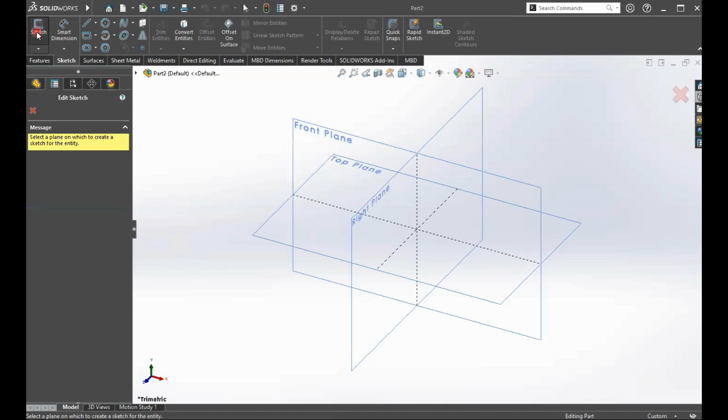All right, so we're going to start by using the section views to create our part. We're going to begin with the solid part, then add the ribs, and finally the holes of the part. So we're going to start by going into SolidWorks and creating a new part. Just give me a second here. Okay, so we're going to create a new part. Click OK. And finally, we're going to go to Sketch and create a sketch on the right plane.

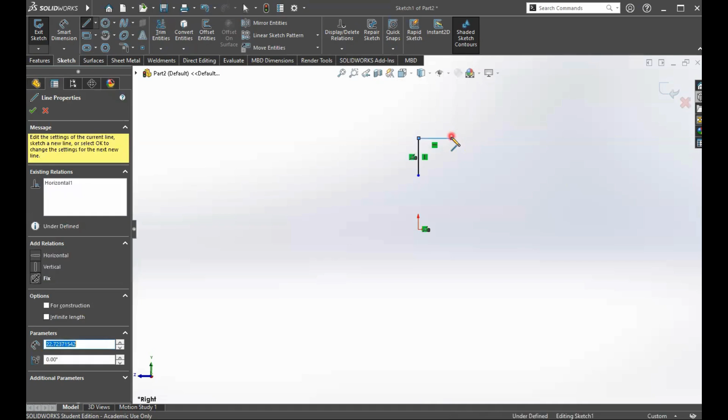So let's go to SolidWorks again. We're going to create a line. Here, this part, we're going to start sketching like this and like this. Okay, so what I want you to have is this random form over here that is going to make sense later. So just trust the process.

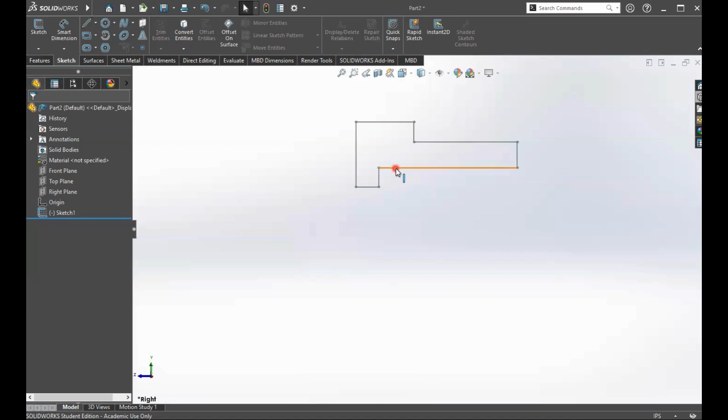And be aware that here at the bottom right of the screen, where it says custom, we have selected inch, pound, and second, because our dimensions are in inches. Once we do that, you can see it turns gray. Don't worry, just right-click on it and click on Edit Sketch. So you can edit the sketch, and now our dimensions are in inches. So we're going to start adding our dimensions to this part, starting with these 3 inches.

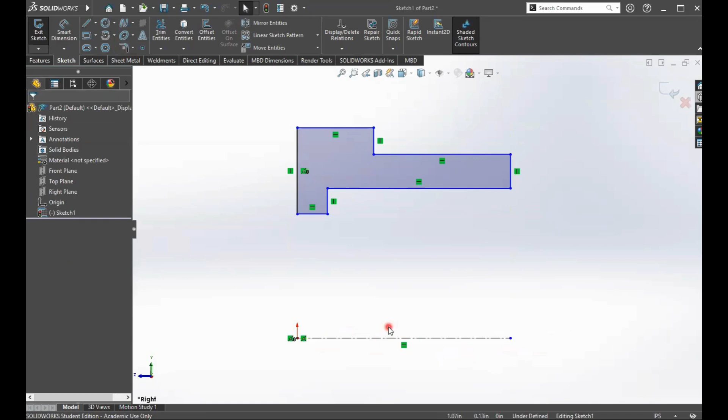So when we go back here, we're going to create that axis by selecting, in this line menu, a center line, then clicking here just in the middle, creating a line over here, then pressing Esc. You have created your axis. Now we can use this axis to create our dimensions. We click on Smart Dimension, click on the axis, and then on this line. And as you can see, if I pass my mouse through the line, I can actually write the diameter, not just the radius, so I don't have to make any calculations. So I'm going to click here and type 3. Now we have our first 3-inch diameter from the drawing.

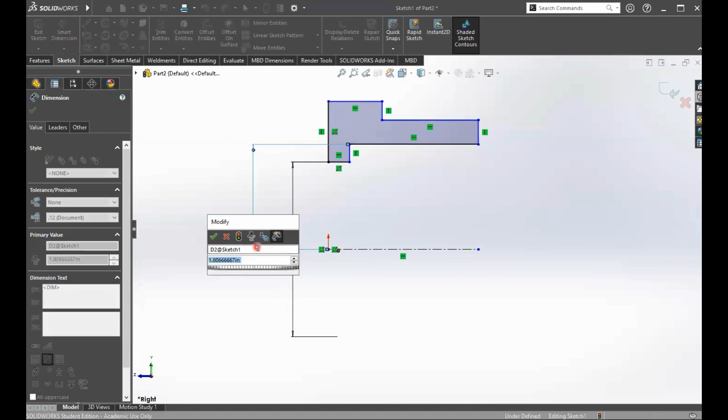Then we're going to write our second dimension, which is 3.5. Let's go back to SolidWorks and create another dimension of 3.5. Oh, sorry. As you can see, I did it without taking the diameter into account. So let's go back a little. I'm going to delete this, and create the smart dimension from here to here. Then if I pass my mouse through the line, I finally have the diameter, and I can write 3.5. And then I have my first 2 dimensions.

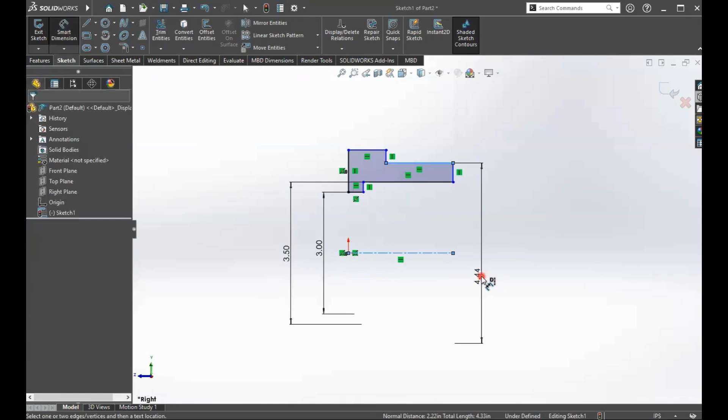Now what I'm left with is these 2, which in our drawing are 4.0 and 7.5. So let's do that. Here to here, it's 4.0. And here to here, it's 7.5.

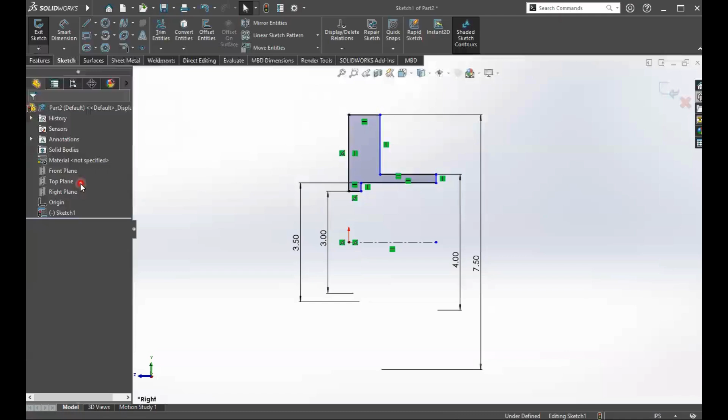All right, now what we're missing is just the depth of this hole, the depth of the part, and the final depth of all the extruded part, which we can find here in these ordinate dimensions, okay? So here, the depth of the hole is 0.5. So we're gonna go back and click from this center to this point. It's going to be 0.5.

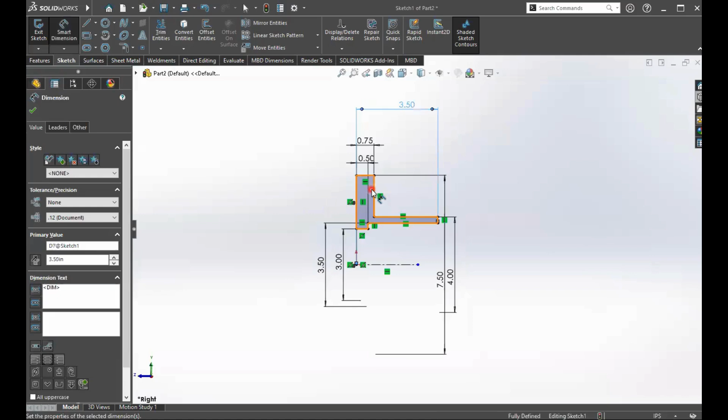Now again from the center to this point, it's going to be, let's see, 0.75, and the final length is 3.5. So we're gonna make from this point to this point 3.5. And here we have our final part that we're gonna revolve and finally create our part.

Okay, so here we're gonna go to features, then to revolved boss/base, and our part will select automatically the axis of revolution, which should be this one. And then in direction, we're gonna click blind and 360 degrees and click OK. And ta-da, we have our flange.

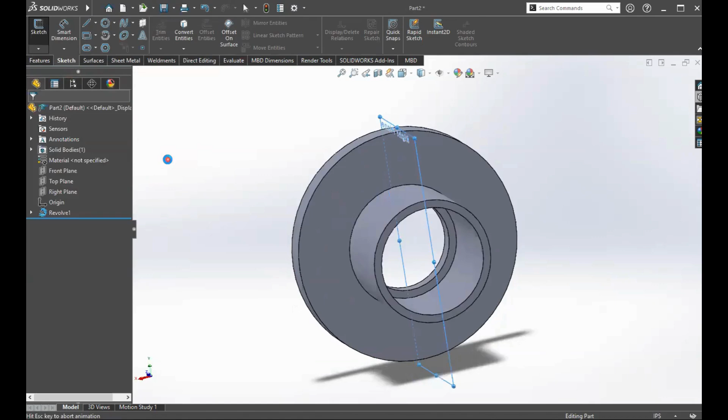Now what we're missing is just the ribs and the holes, which are going to be easy because we're going to create a sketch here and use the rib operation, which will make it a lot easier, okay? So we're gonna click on sketch, display this menu and click on right plane. Finally, selecting a line, clicking here and clicking here.

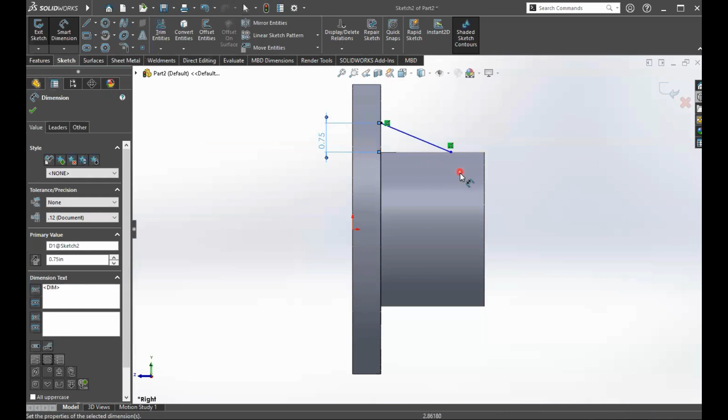And as you can see, the point is coincident in this cylinder, and here the point is coincident in this face. So we're gonna create a smart dimension of, let's see our drawing, 0.75 from here to here, and 2 from here to here.

Now we can make a rib operation by going to features, then clicking on rib, and here selecting that it's going to start from the middle, and in depth 0.5 inches, and finally click on yes.

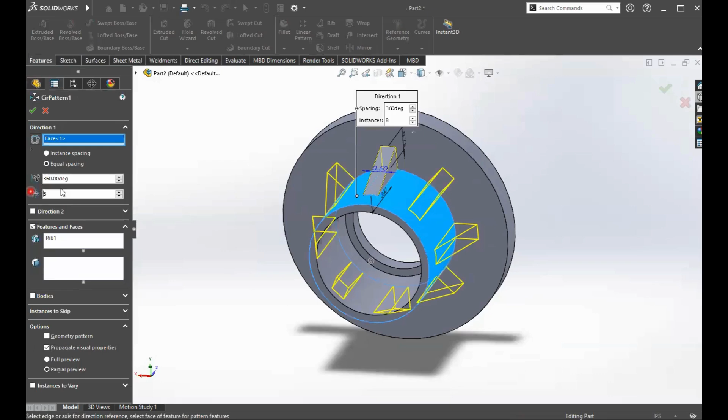Then we're going to create a circular pattern. Here in the features tab, we're going to click on circular pattern. And when we want to select the direction, we can select the cylinder over here. And then here 360 degrees. And here we only have 4 ribs, so we're going to select 4. And that's it. Easy as that.

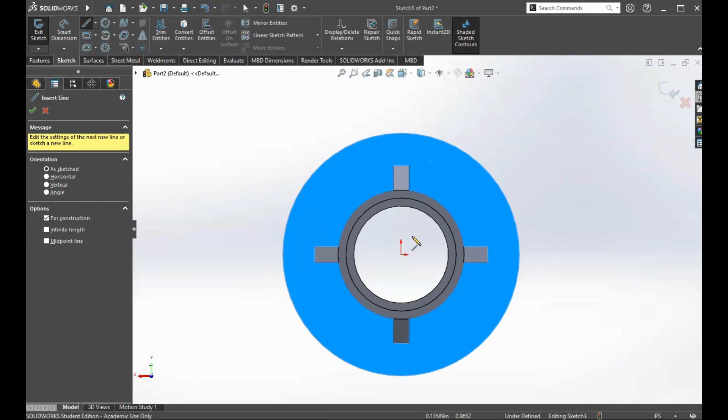So the last part finally is going to be to create the holes. To do that, we're going to click on this face, right click on it, and then create a sketch. And we're going to make first a center line from the center to this point over here. Let me show you. Okay, great. And finally, we're going to create a circle over here.

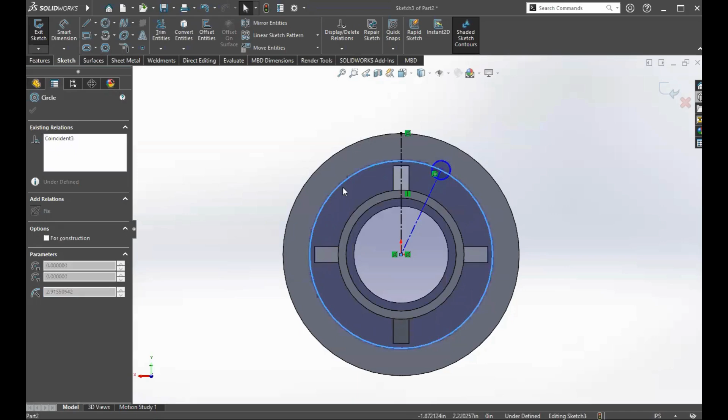Another center line that goes from the center point of the circle to the center point of our flange. And finally, we're going to create another circle from this center point to the point of our hole that we're going to make. And we're going to right click on this circle that we created and make it construction geometry.

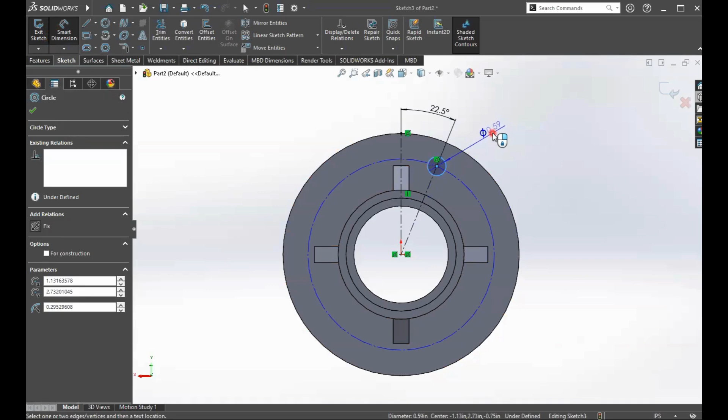Now that we have this, we can click on smart dimension over here and add our dimension, in this case of the angle that we want. The angle here is 22.5 degrees. So we're going to go ahead and do that. 22.5 degrees. And finally, we're going to add a dimension here of 0.75.

And here, the diameter is going to be, let's see, here it says 5.75, okay? 5.75. So we have our sketch fully defined. Our sketch is perfect, so we can make the hole. How do we know the details of the hole? It says here 0.75 through all, and it's going to be 8 holes, okay?

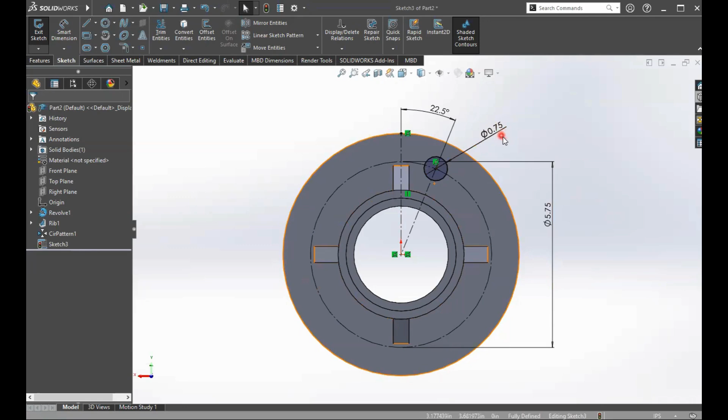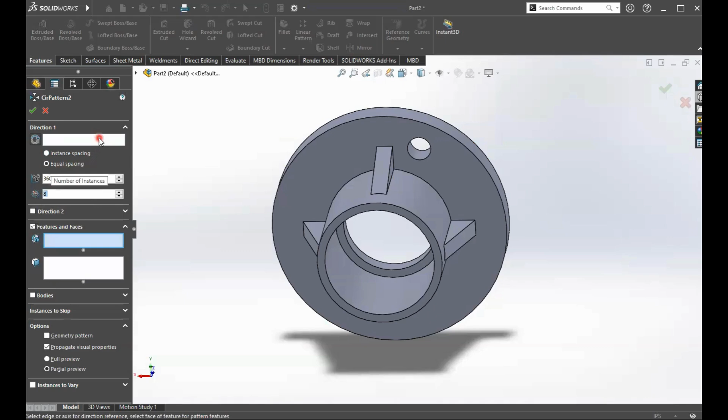So here it's already 0.75. Now we're going to create extruded cut through all, and then click yes. And now we know that we have 8 holes, so we're going to do the same as we did with the ribs and create a circular pattern, but now with 8. Our direction is going to be this cylinder, our feature is going to be this one, and we're just going to click yes. And that's how we finish our holes.

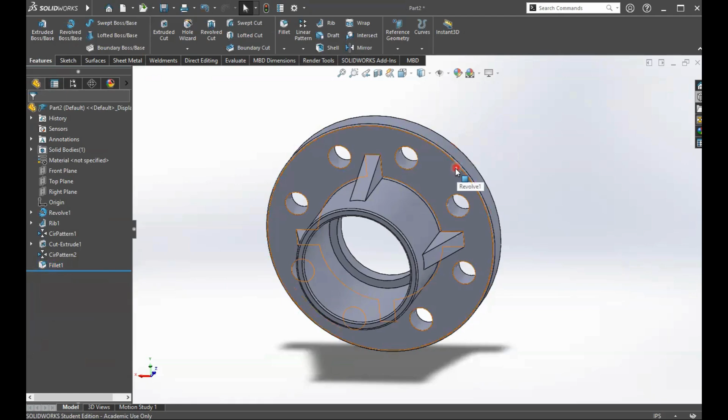And optionally, you can add fillets, which I like, so I will, here in the fillet operation. We're gonna put 0.05 here instead of 0.1, and then click on this face over here, and maybe on these edges. So we have a prettier part and also a part that doesn't have edges that could harm the person that manipulates it. So that's great. And this is how you make a flange out of a part that has been firstly developed into a plane.